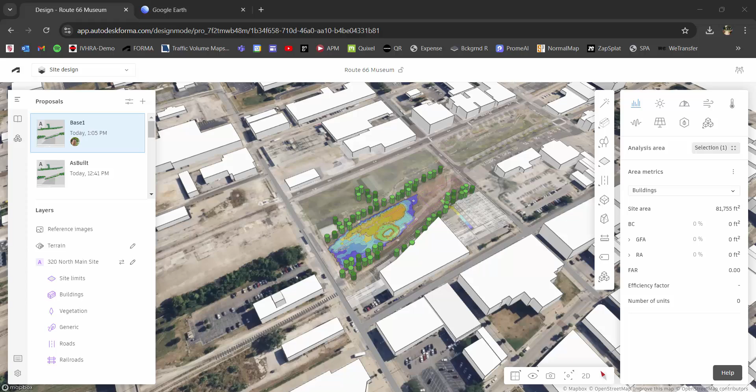Okay, so on this project, I have two side quests that I'm going to take everybody on because, hey, sometimes side quests are the best. This one in particular is something that, I started architecture because of Lego. And I love physical forms. I absolutely love building models, but that's something that's kind of lost for obvious budget reasons in architecture. But fabrication and 3D printing is really bringing that back.

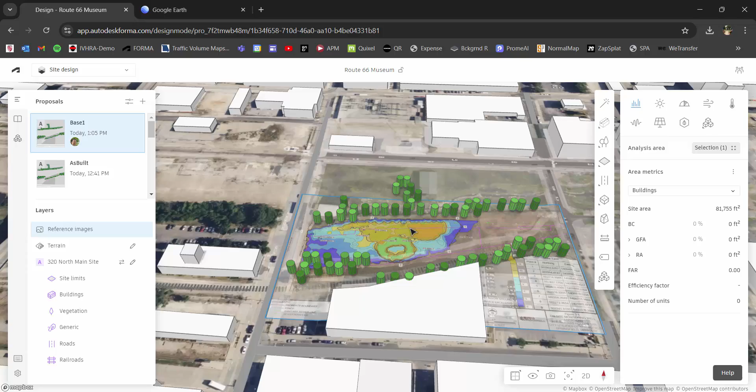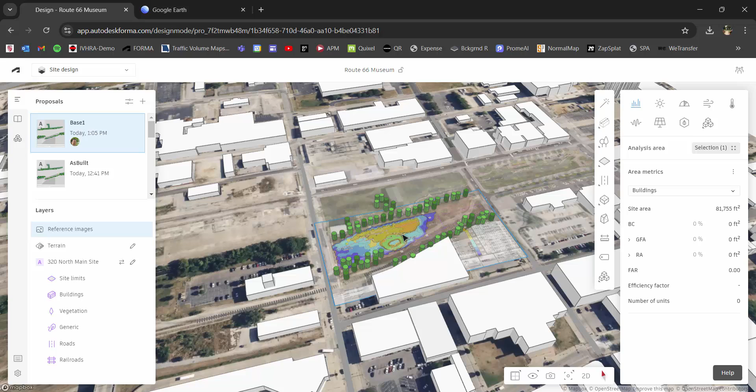And this is one of those things as a site model that would be great if I could quickly fabricate it and begin creating some physical models with different options, things to show a client. Now, I don't have a huge 3D printer, but we have one that's sizable enough to at least start looking at this workflow so that as larger 3D printers become more accessible, it's something we can be ready to start doing. So process is pretty simple.

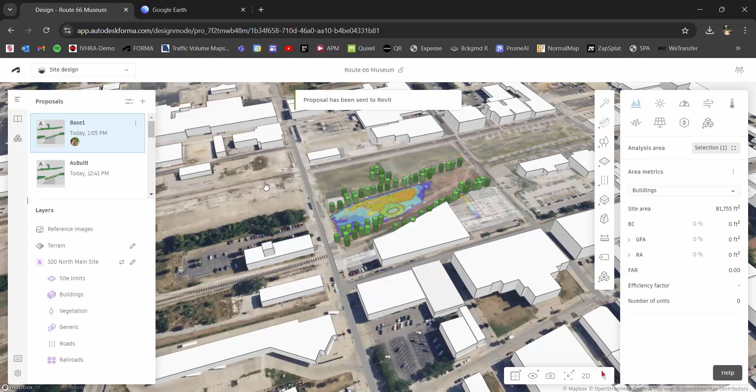I've got base one selected right here. I'm going to go to my three dots, and right here is two things: send to Revit and download Revit add-in. So if you haven't done this yet, you need to make sure you're adding the Revit add-in. Essentially, it's a simple little plugin. But before that, I can just click send to Revit once I have that plugin installed. So inside of Revit, I'm just going to go to New, Browse. Let's set up something with the default template.

And underneath Massing and Site, you are going to see, once you've installed that plugin, Forma. I can go to Load Proposal. And I am going to see this. Oh, well, I need to update. That's okay. We're just going to continue without updating. Cross our fingers, hope that it works. But I should see a list of recent files that I can bring in. So here we go, Route 66 Museum, base 1, load.

So this is going to take a few moments, but one of the key things this is going to do is it's going to give me a topo solid as well as all of my buildings in physical three-dimensional virtual form, which is really cool because then really I'm only one simple step away from sending this to a 3D printer.

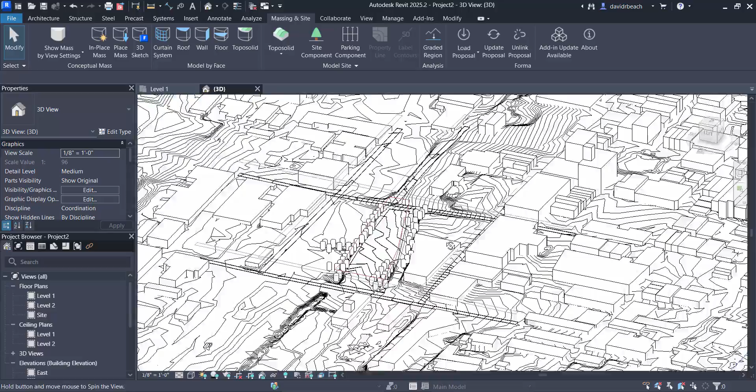So if I look at this in 3D, I have this really amazing map already coming together. It's got my trees on it. I can identify exactly where the site is. I have topography lines now everywhere across this Revit model, and this is something that I am ready to start working with. Now, obviously, I could start putting massing proposals on there as well, but for right now, I am just interested in getting this sent to the 3D printer.

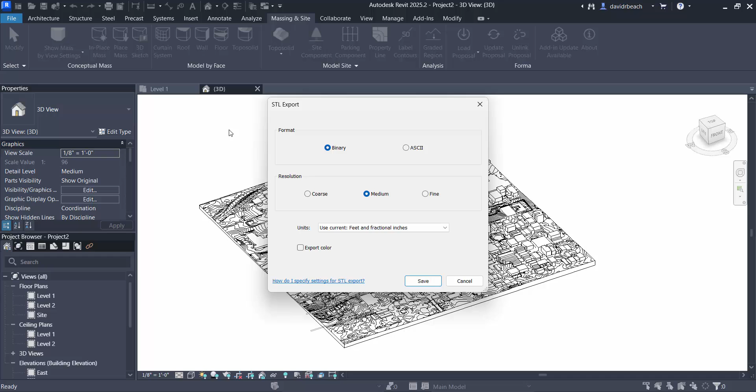So from here, all that I need to do is File, Export, CAD formats, and I'm going to save this as an STL file. And I'm going to send this right to my desktop, and we'll call this as built Route 66 site. Okay, once that's exported, we're going to need to run it through just a couple of simple things, namely the Prusa slicer, and we are going to need to validate the scale that it is going to come in at.

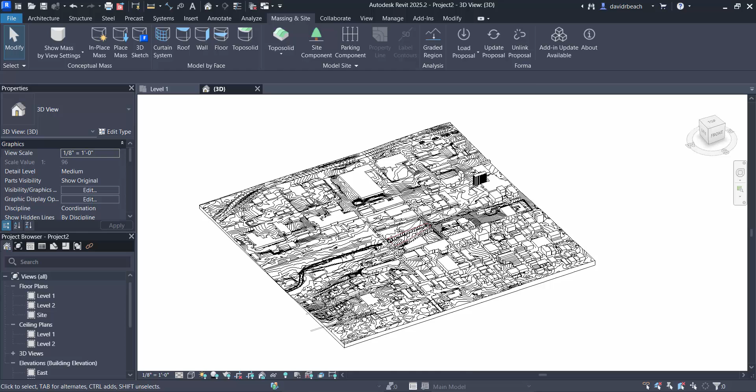So let's switch over to the Prusa slicer. Again, Prusa printer is absolutely amazing. It doesn't look like I have Prusa Slicer launched. Let's go ahead and launch that really quickly. Oh, I do. Here we go. So we're running MK4s and MK3s. MK4s are my favorites, so we're going to work through that. So we'll go Menu, File, Import, STL, As-Built Route 66.

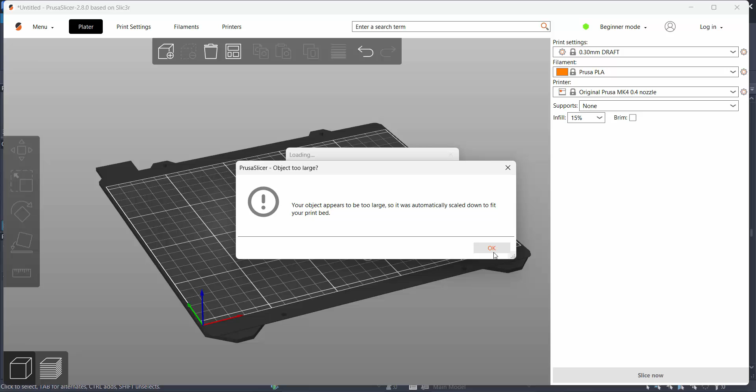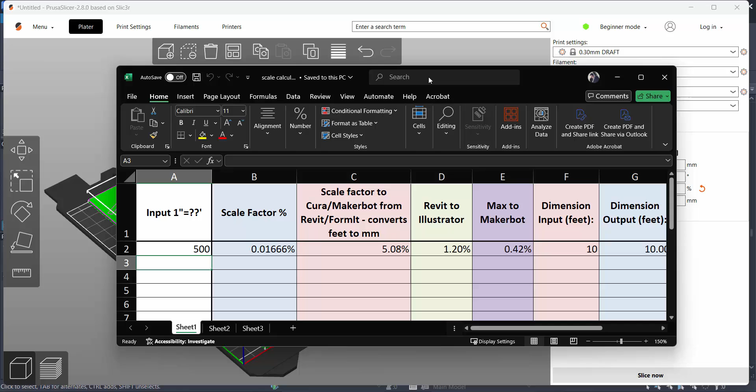Obviously, this is more than a mile by a mile in size, so it's not going to fit. So it's going to automatically scale down, which is totally fine. And we want to look at these scale factors and see what exactly I can do to get that working. So we have a little thing called the scale calculator. And this is essentially working from Revit, assuming that we export without changing anything. We're not exporting in millimeters, we're exporting in feet and inches.

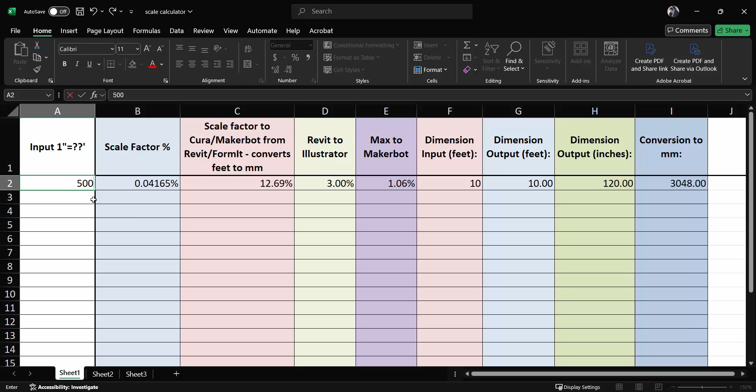And I know that if I am 1 inch equals, let's say, 200 feet, I would have a scale factor of 12.69. We're going to do this at 500 feet, so 5.08% is the scale that I need to be at. 5.08, and that is ready to slice and send. So we'll run the slice now. That's at 15% infill, which is a little bit much, but you can see in 4 hours at reasonably good settings for an architectural model, I have a 3D model, which turns out really, really nice.